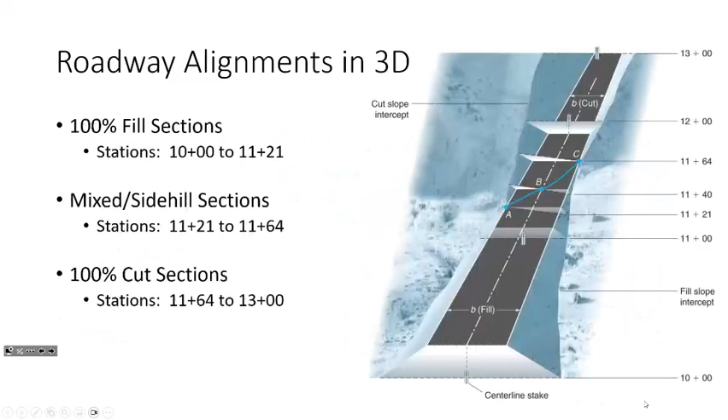We've already seen all this, so let me go back to our example. This is the example we were looking at last time, where we were taking survey data collected—probably from an actual differential level or an auto level. Not to say you couldn't do it with a total station, but you could do this with an auto level and just do some backsights and foresights.

At a particular station along a roadway project, we have the height of the instrument, then a series of foresights, so we take the height of instrument minus the foresights to get the elevations along the land. We also have the distance from the center line—this shot was on the center line, this to the right, this to the left. The idea is: how much cut do we need to generate, what's the area of the section? If the road needs to be at 858.9 feet and we want a 1.5 to 1 slope off a roadway template that's 30 feet wide, what's the area?

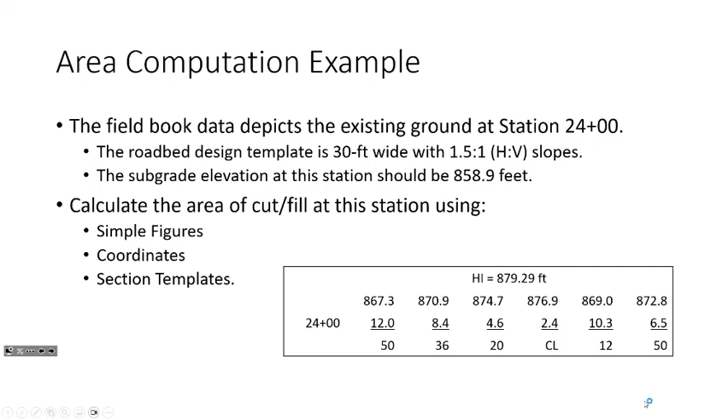What I did last time is plot out the survey data. This is what the land looks like along that cross section, and this is where the road is. So I've got A, B, C, D, E, F, and then G, H, going clockwise. I also stuck a point here in the middle, which I'll use as a reference for later.

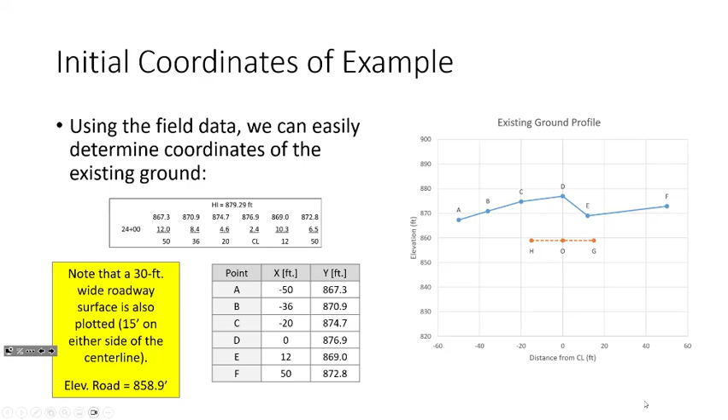Now I need to figure out, since my excavation is going to be at a 1.5 to 1 slope, where these lines intersect. This is what we did last time—we figured out where that point was and computed the coordinates of point R by hand. I'm not going to repeat it for point L because it's literally the same calculation—if you can do R, you can do L.

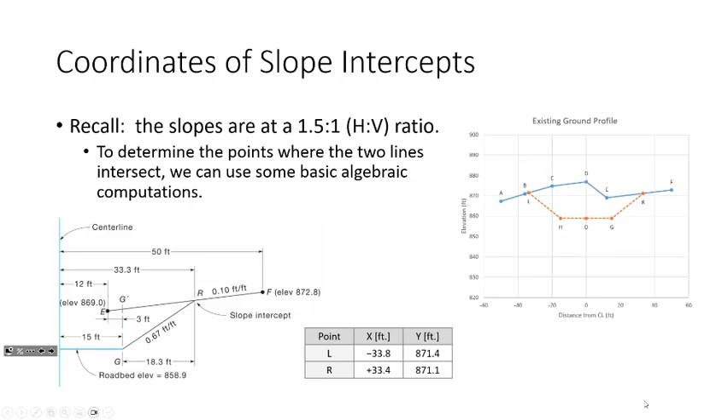So that's where we stopped, and I don't want to rush this. Recall I mentioned there are three methods we'll focus on doing by hand: the first is computation of area using simple shapes, the second is the shoelace method, and the third is using a template. I have the answers to all of these in the slideshow, but I don't want to just give you the answer—I want you to understand where they came from.

So let's talk about the simple shapes computation. What I'm doing for this area computation is taking this area to figure out the total amount of cut, the total amount of material that I'm removing from here.

So what I'm doing is I'm splitting this up into a series of simple shapes. I've got 1, 2, 3, 4, 5, 6 of them. The way I'm doing that, I've got a blown up version here on the board. All I'm doing is finding these unique points and just drawing vertical lines.

So what I'm going to try and do is figure out the area of these 2 shapes. This is a triangle and this is a trapezoid. The area of a triangle is pretty easy, right? We're just going to take base times height over 2. So this is the base, this is the height.

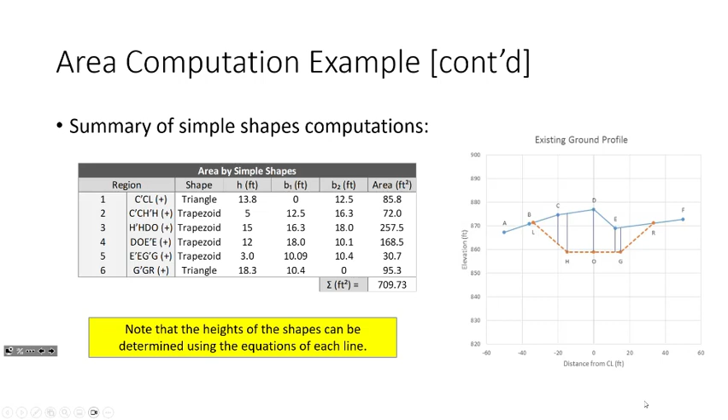13.8. So if you see here in the slide, I've got, oh, I labeled it backwards. I did h's and b's. It doesn't really matter. But see how I've got this 13.8 and 5? So now what I'm going to do is see if I can fill in the rest of this right here. Let me show you how you would do that. It's pretty straightforward. Let me break out the notebook here.

So we'll get to the volume computations here in a bit. This was the problem we did last time in class, which is what you all have in your notebook. This is when we were trying to figure out the coordinates of R.

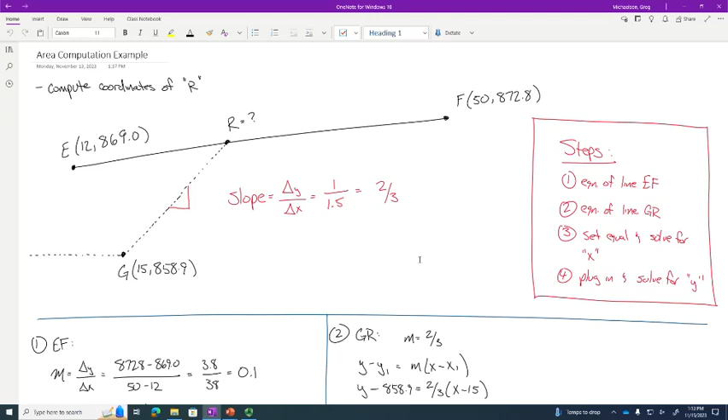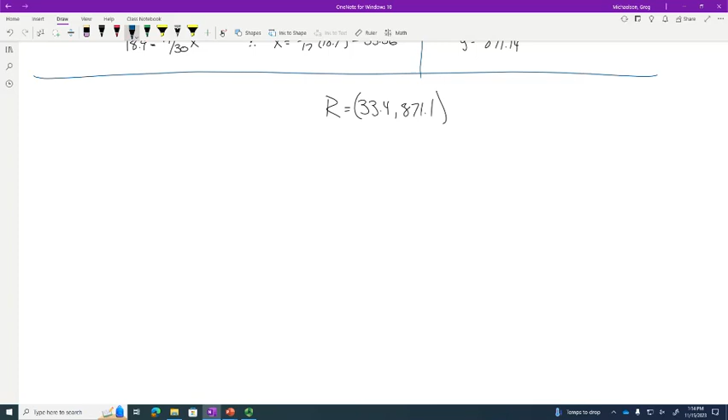I'm going to continue on with these calculations and show you how to figure out some simple shape areas. I'll call this sample computations for simple shapes.

The cool thing is that if you understand these components, remember there are 3 ways of computing these areas: simple shapes, the shoelace formula, and the section templates. If you understand these computations, the section template computations will be very easy because it uses a lot of the same math.

Let me show you how we would do this, piggybacking on what I've got going here. Let's start off with this first area, we'll call it A1. I'm going to try and figure out the area of this triangle.

So it's going to be base times height over 2. I need to figure out H1, so my goal is to try and figure out the equation of this line LH.

Now, L is negative 33.8, comma 871.4, and H is negative 15, comma 858.9. I've got to believe that you all could figure out the equation of the line given two points, so we don't need to go through that here.

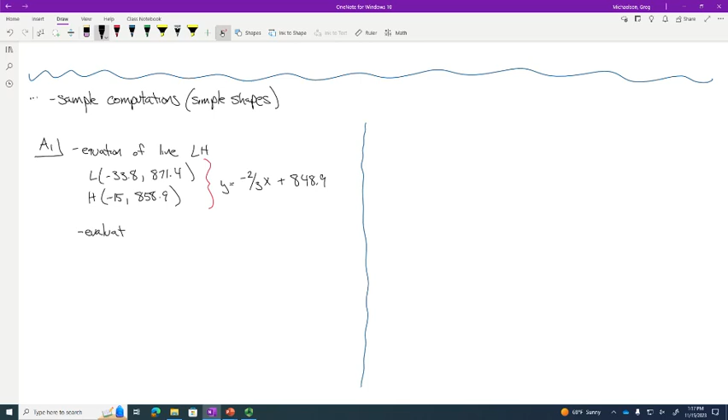At x equals negative 20, y equals negative 2/3 times negative 20 plus 848.9. When you chug that out, you get 862.2.

So the coordinates of C prime are negative 20, comma 862.2. So where this is negative 20, I can replace this part with 862.2. Let's just take a look at this - does that make sense? This is 858.9, this is 871.4, along that line, that's in between. Does that value make sense?

So let me ask you this - if I now know this coordinate, how do I determine H1? Subtract the y value of C and C prime - that's exactly right. So take the difference: 874.7 minus 862.2, and that equals 12.5. Now that I have 12.5 and I've got 13.8, I just do base times height over 2. Does that make sense? Everybody okay with that?

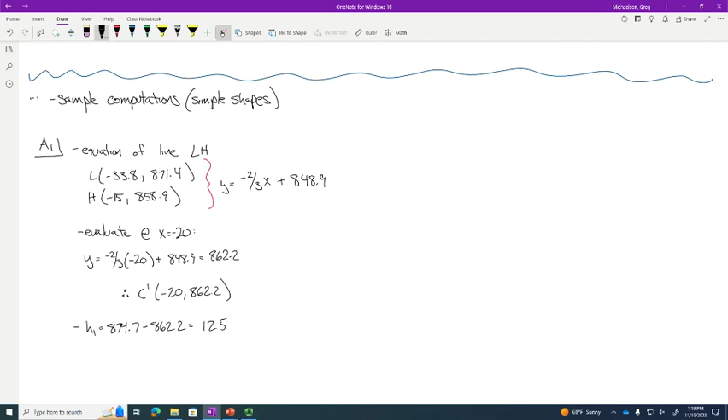So tell me, do you want me to go ahead and do H prime, or are you all good? Okay, because at this point it would start to become somewhat repetitive.

So what you would do is keep doing that for every shape, and here's what you'd get: an area of about 709.7. The first shape is 13.8, 12.5, and you can see where that came from. There's the 5, so we get 12.5 on H1, and you keep going until you get all the areas.

This is a very Excel-friendly computation. That's how you would compute the area with simple shapes.

Honestly, I think the easiest way to do it is to use the shoelace formula. Remember, what we do is start at point O, list all the coordinates of the area in question in clockwise fashion—O, H, L, C, D, E, R, G, O—and then list O again. Then do all the products this way, then all the products this way, sum that, take the absolute value of the difference, divide it by 2, and bam.

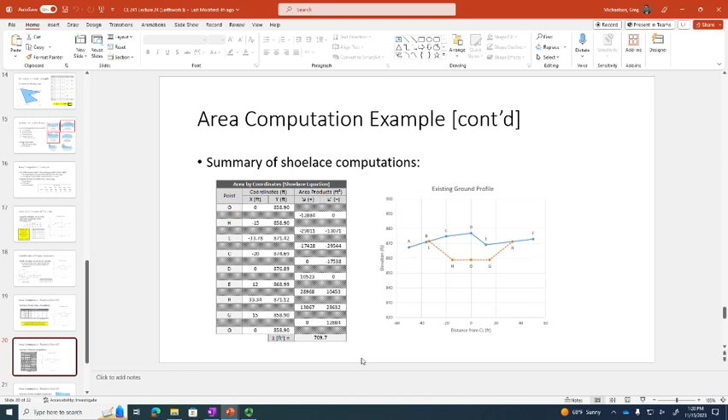Now, if you're tracking your decimals, you should literally get the exact same answer for the shoelace formula as for this, because these are both exact computations. That makes sense? You're literally computing the area exactly.

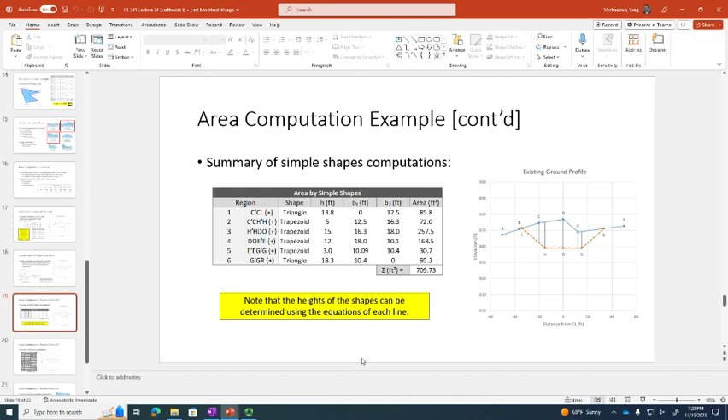Where you should get a different answer is if you're using the section template. The nice thing about the section template is that it's easy. It is very easy.

Because all you need—the way a section template works is we just take a few base values: a distance to the left, a distance to the right, a height to the left, a height to the right, and then a roadway width and a center height, and just plug and chug into this formula. This formula is greatly simplifying what's going on from a geometrical standpoint.

With that simplicity, you get an easy formula to compute, but you will not get the same answer. If you look at the real land, it's going all over the place. It's not fitting this nice, pretty picture that you see here. So when you plug and chug into your section template expression, you're going to get a different answer than if you do it for real.

But again, with ease, you sacrifice a little bit of accuracy. What I was saying earlier is that in order to use a section template, you need these FL and FR heights, but you can get that doing this. So once you get those, you can use those values for both a simple shape computation and for your section templates. Does that make sense?

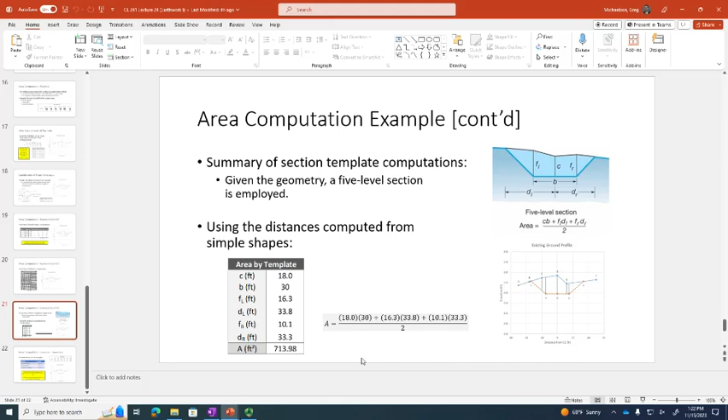All right, any questions on that? So when it's all said and done, here's the results of the example, and again, these two will give you the exact same answer—this one will be a little bit different. I say exact because depending on how you track rounding, you may get a slightly different answer, but they should be theoretically the same. Any questions on the area computations?

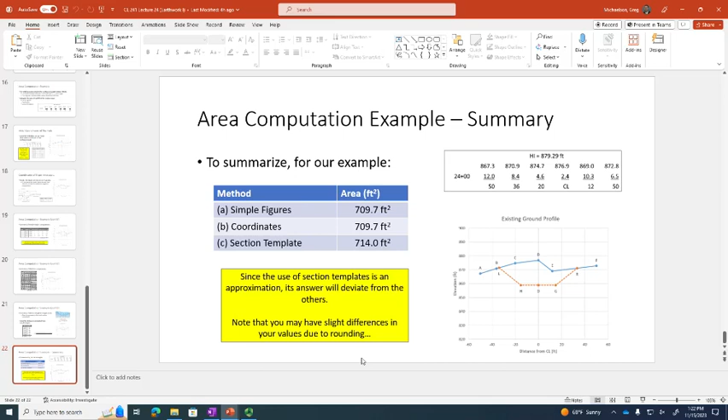Everybody good? Let's talk about volumes. All right, let's get into volume computations.

All right, let's just get back to the big picture. To be clear, some of this discussion today will probably trail a little bit into after break, because we probably won't get to mass haul diagrams or compaction and things like that, but we'll at least cover the basics of some volume computations today.

So remember, if we're talking about a road-based project, we've been looking at it in three different contexts. We've been looking at the plan view, and in the plan view we were considering the installation of horizontal curves to create a smooth track. Vertical curves along the profile view will also allow for a smooth path.

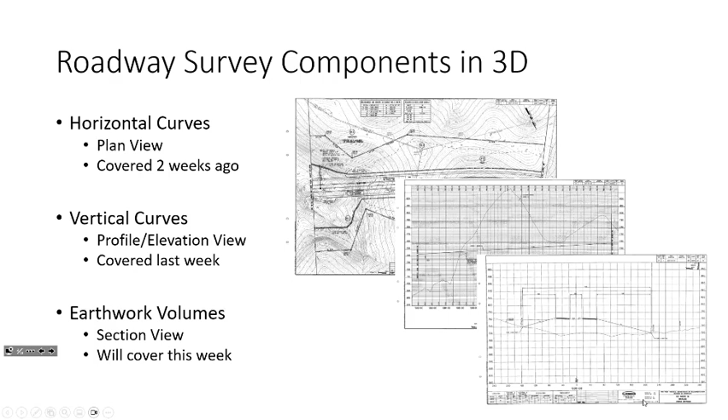But right now we're talking about earthwork calculations, and our goal is to really calculate volumes. Now remember, when we're talking about earthwork, when we're talking about construction, we're talking about moving soil, removing earth or rock from one place to the other, and so we have terms for that.

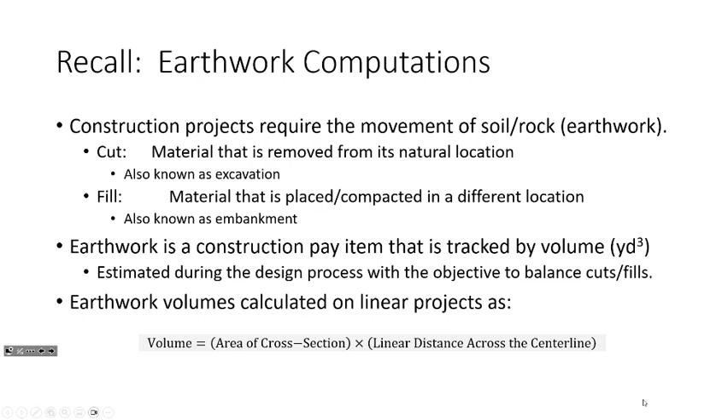Cut is when we take material that is removed from its natural location, and fill is when we place it, and more specifically compact it, in a different location. We ultimately want to balance the cuts and fills, like if we added up all our cuts and added up all our fills, we'd theoretically like those to be zero. The way we compute volumes theoretically is by taking areas times lengths. I'll get more specific with that today.

So you do need areas first. In the previous lecture, I was hyper-fixated on how to compute those areas. Today, I'm going to assume you have those areas, and now let's do something with them. So let's talk about some volume computations. I'm skipping this since we already covered all the different ways to compute areas.

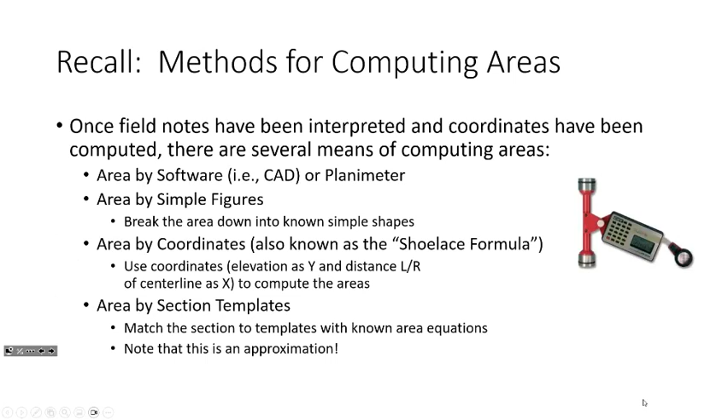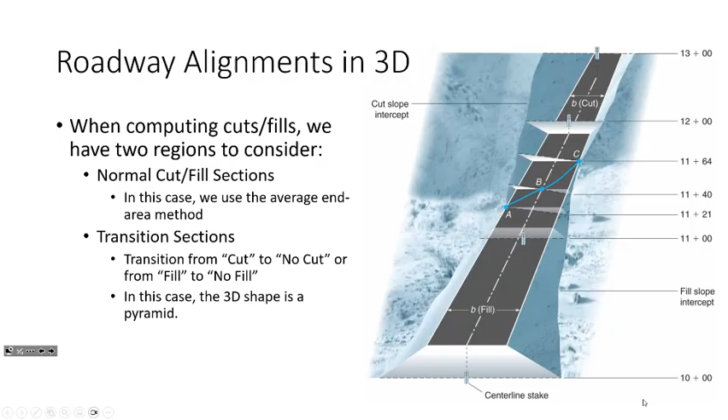So I want to show you what cut and fill computations look like. At each station we're going to have a series of areas. For example, at station 10 we have an area just for fill, whereas at station 13 there's an area only for cut. That makes sense because we're filling here and cutting here. So we've got a really big area here, maybe a smaller area right here. But notice in the middle, we've kind of got both: stations 1121, 1140, 1164 all have both cut and fill areas.

This is where it's transitioning from a cut to a fill along the route of the project. So this would be a situation where the existing ground looks like this, and we want the road to look like that. So this is going to be a cut, and this is going to be a fill. That station, for example, is going to have both a cut area and a fill area. That's a transition. Everybody with me so far?

So here are my computations, and I'm just throwing them at you, but I really want to focus on three questions. The first question is, how do we compute these volumes? How do we compute the volume right here, the volume right here, the volume here? How do we actually compute those? We're going to talk about that today.

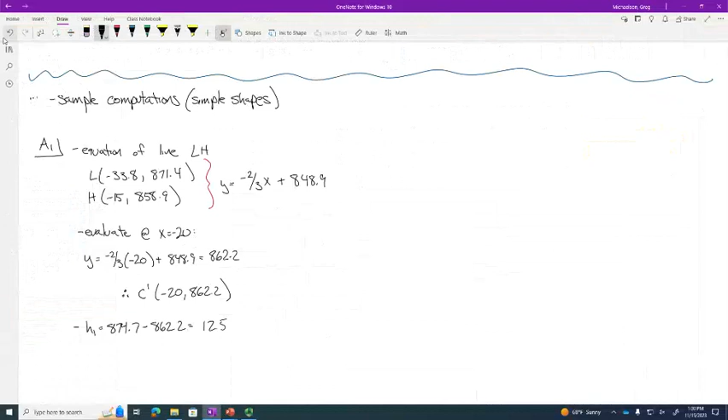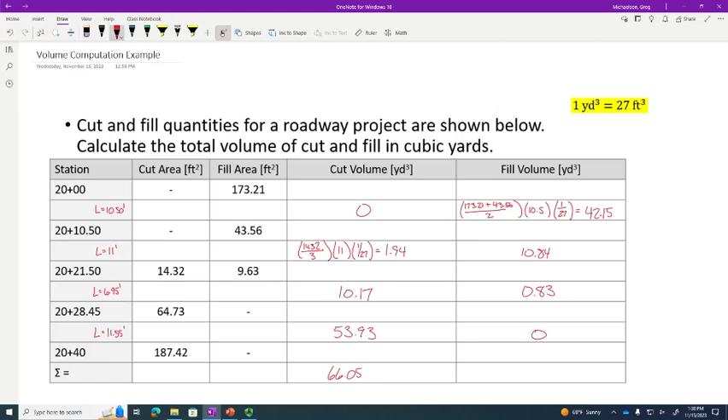Okay, I'll do the last one because I think by now you're probably getting the pattern. 53.93. Okay? So what I'm going to do now is, if you notice the very bottom row, I'm doing a summation. So I'm going to sum everything here and sum everything here. I'll do this one for you because I think you can do this. 66.05. And we'll just indicate, again, that's a cut.

And then down here, we get 53.81. That's a fill.

If this was the end of the story, what would the contractor need to do? Would the contractor need to go find some additional material to bring to the site, or would the contractor need to find a place to truck out all the extra stuff? Is it the first scenario or the second? Second, exactly right. Because we've got this much cut and this much fill. So it's like we're removing this, but we're only placing this. So the difference between the two is how much extra material I have at the end of the day.

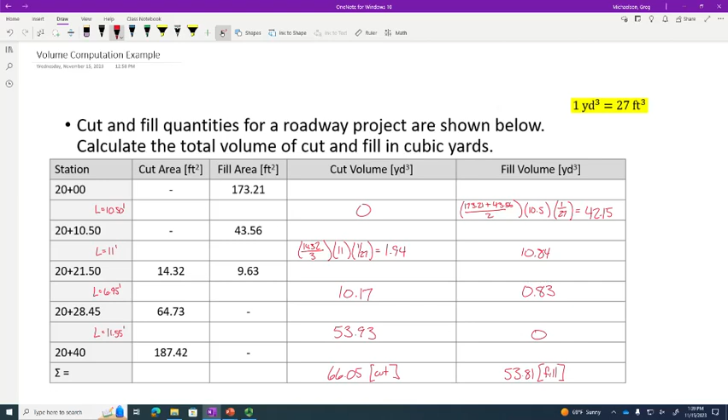Make sense? Now, let's go back to - any questions on this? Okay, now I want to go back to my slides here, because if you remember, I said there were 3 questions to consider. What were the 3 questions? Well, how are the region volumes computed? We figured that out, right? It's pretty easy. How do we handle the unit differences? We figured that out.

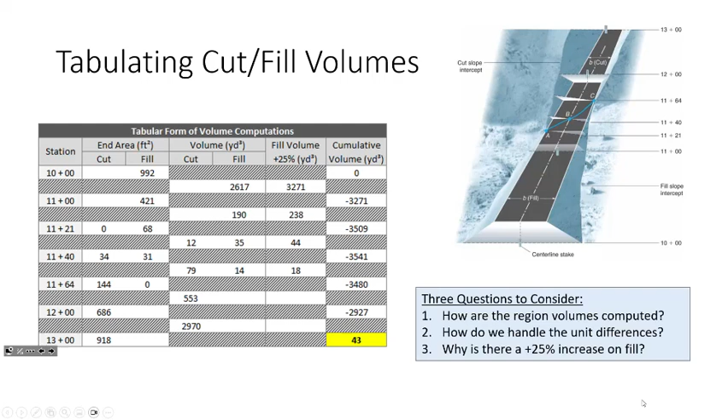But I didn't talk about this - what is up with this 25%? What is going on there? Okay, let's talk about that. I want to talk about the states of soil and rock in the real world.

Okay, so how many of you have ever heard the term in situ? If you ever hear the term bank or the term in situ, bank material or in situ material means material in its natural state.

Okay, like in place, that's what in situ means. Loose is what happens after you've taken in situ material and removed it from its natural state. And then compacted is after you've placed it.

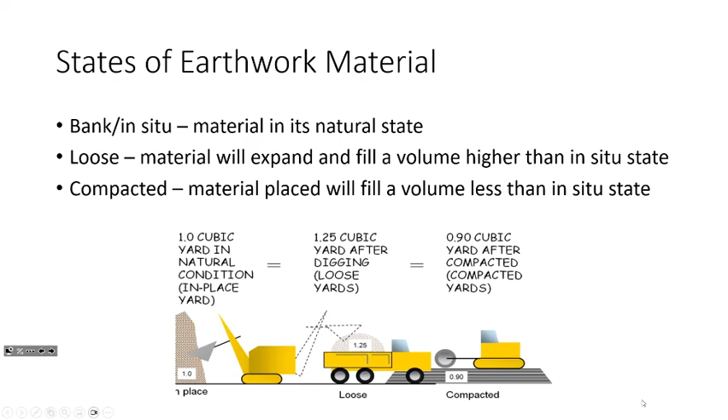This is going to be a silly question, but how many of you have ever dug a hole in your life? If you dig a hole that is a box, 1 foot by 1 foot by 1 foot, and then look at the amount of dirt, it's more than 1 foot by 1 foot by 1 foot. It doesn't seem like it, but it's more, right? There's more dirt there - where did all this dirt come from? The hole's not that big, right? Well, it's what happens when you take material and you disturb it, okay?

So a good example is if you take solid rock and busted it up and turned it into gravel, and took that and looked at its total volume, it's going to be bigger than it was in its initial state because there's going to be air voids there, right?

It's a funny experiment you've probably seen in chemistry, or maybe middle school. Let's say you had 50 marbles, all of an equal size. You can compute the volume of a single marble in milliliters, convert it, and multiply it by 50, and say okay, here's the volume of 50 marbles. Then take those 50 marbles and pour them into a graduated cylinder, and look - it's going to be higher than 50 milliliters, right? Because there's all that air between the spheres. You can't take 50 spherical marbles and stick them in a perfect container like that, right?

This gravel is going to have air voids, it's not going to fit together regularly. So to express that from an earthwork standpoint, we have two different terms we use: swell and shrinkage. Shrinkage is what happens when you take a material and compact it such that its density is greater than it was during its natural state. This is very possible for really fine materials and for clay materials.

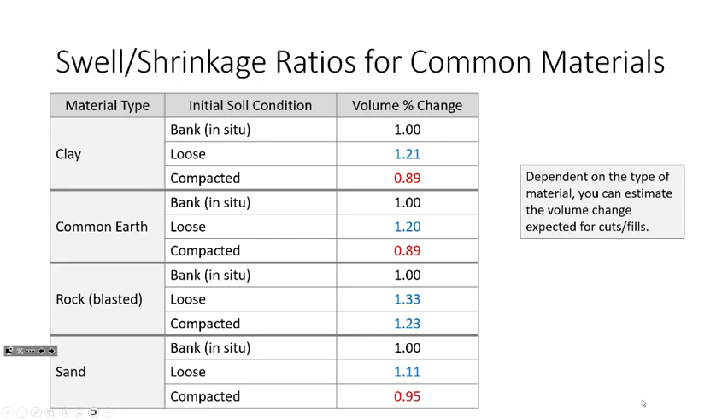For clay, we might up the volume once we make it loose, and when we compact it we decrease it a little bit. So from a volume computation standpoint, we'll increase our cut and fill volumes accordingly. Now the other thing I want to mention, and I don't want to rush it, is what's called a mass haul diagram.

How many of you are in statics right now and have started to assess the ubiquitous shear and moment diagrams? Does that become a topic of discussion yet in statics? It will soon, trust me. Shear and moment diagrams are two of the most commonplace tools that engineers use, period. I know the folks who have me for structures right now are probably getting tired of them at this point.

We've used them quite extensively in that class, am I right? In short, a shear and moment diagram is a representation of the change in forces along a given structure. In statics, you learn about shear and moment diagrams at a very basic standpoint, but when you get to structures, we do them for real.

There is somewhat of an analogy in the earthwork world, and we call those mass haul diagrams. A mass haul diagram is a representation of the change in cut and fill along a project.

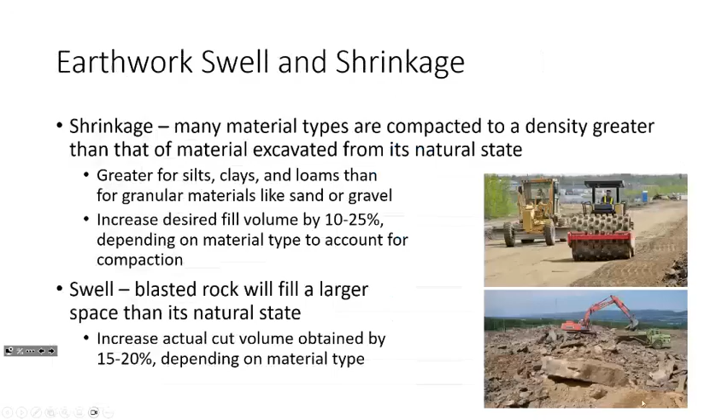It's much easier than you would think, because all we do is take our cumulative cuts and fills along the project and just plot them, usually in Excel. We'll probably do that when you come back from break, because I don't want to rush it. If you understand this, then a mass haul diagram is incredibly simple to do.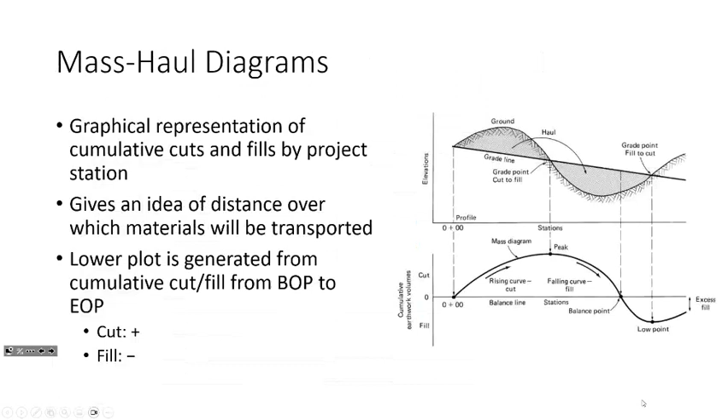When we come back from break, we're going to take that previous example and tweak it a little bit. We'll assume we've got a 25% shrinkage that we need to account for, since the material is going to be compacted once it's filled, and then we're going to plot a mass haul diagram.

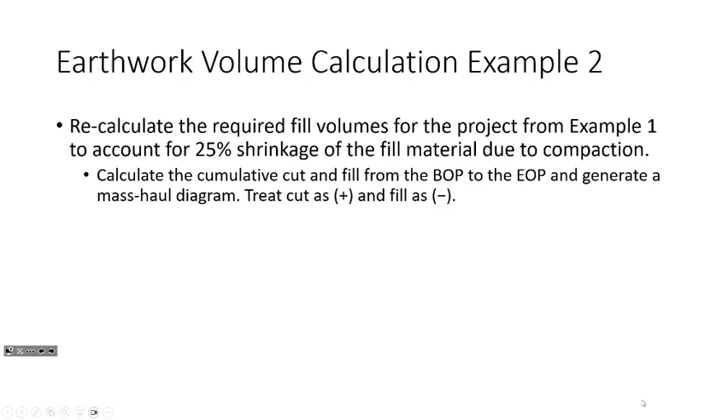Because you're coming back and you're like, I don't even remember what we're talking about in this class, Dr. Mike. It's the last week of the semester, we're tired, we just want the semester to be over. Let's just do something easy — okay, we'll do mass haul diagrams because it's really easy.

All right, does anybody have any general questions?